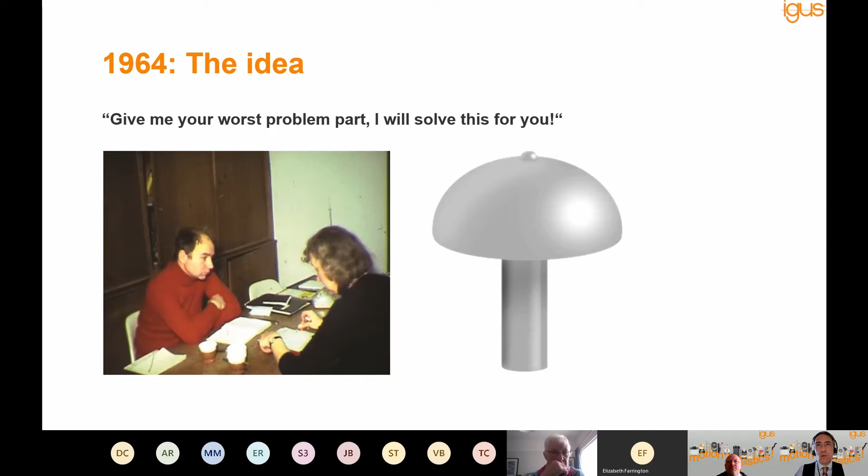There was a second company around the same time involved in manufacturing textiles. Again, the problems they were having was because of greased parts. The textile fibers were getting into the parts and causing very large amounts of wear. We solved that problem with plastics. And that's how the company started.

Fast forward now, we are a business with 3,500 employees, in 37 countries around the world, with subsidiaries such as the UK, still family owned. Gunter's son is now the CEO of the company. We're still on this mission, but we've expanded it out into very different, much broader areas of business. So now we've gone from these two little plastic parts to a full range, a full catalogue of parts.

We broadly describe these into two divisions of the business. One is what we call the chain, based around plastic energy chains. An energy chain is a device for carrying moving cables and hoses. So where you have anything from cranes to accessibility lifts, vehicles, anything that moves on machinery, from the large to the very, very small, we will safely carry the cables and hoses and keep them protected and guided.

In addition, in the 1980s, we developed a range of cables because we discovered that standard cables don't like being constantly flexed and moved. It's a very niche area because most cables, such as the ones you'll have domestically, are used for very light flexing or static use. We discovered they really weren't suitable for millions of movements as you get in a lot of machinery. So we developed a range of what we call chainflex cable.

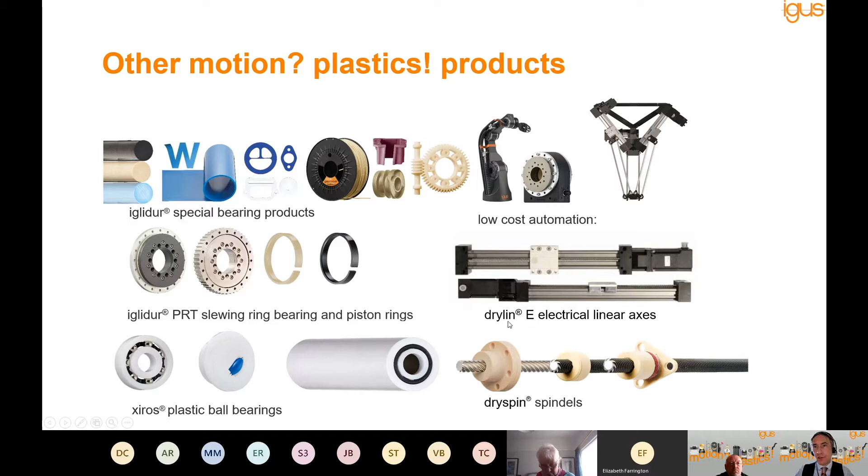More recently, we've developed a lot of different kind of linear systems for spindles, for motion again that we can drive, so we can have either belt driven or indeed lead screw driven systems as well. Again, the same principle where you see these yellowy kind of plastics - that's our self-lubricating plastic, so light, corrosion free, but above all needing no lubrication.

We also work, as well as on OEM applications for repeat business, in the project sphere, where we develop one-off project solutions for customers.

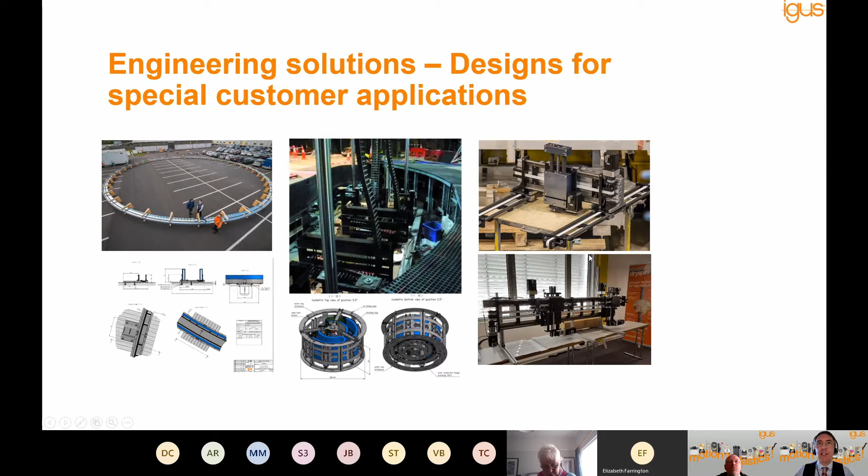And then I mentioned with the gantries that we can offer 1, 2, 3 plus axis gantry systems using our self-lubricating systems. These are a couple of examples of systems that we've developed for customers ready to drop in and drive all of the moving componentry on their machines. So as well as individual components, we go right up to this systems approach.

In 2016, we started to move into another area, which was looking at what we could do with our plastic parts and systems to help with the move to Industry 4.0. In other words, the connected factory, or the Internet of Things, the industrial Internet of Things, depending on your terminology. And for us, this is actually a very logical next step for us.

So as well as offering warranties with our parts, because we test them to destruction, we know how many million cycles they'll take, and we can guarantee that. But actually, the next step is to put sensors into the plastics, embedding sensors in, so that customers have a very clear indication of when the part is a certain way through its life, or indeed if it's in an exposed environment where it could get damaged by the industrial application, where it can stop the machine instantly before something gets really damaged.

So we have all sorts of different sensor systems that look for whether things like the energy chains are broken or the cables are failing because maybe a product has fallen into the application and damaged them. And it can stop the machine instantly to prevent further damage, and can alert engineers via SMS or email or anything you want. Or it can also be embedded into a cloud-based system where you can constantly monitor these components within your factory and see maybe where they are in their lifetime.

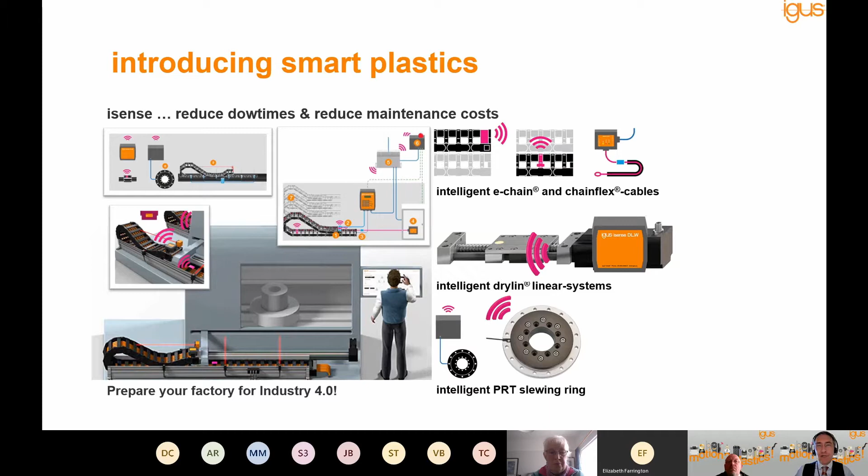And that's a really interesting next step that very high value manufacturing, so for example automotive industry, is really taking up this area, because of course downtime is very critical and very expensive. But more importantly, it's a very good thing for sustainability, because traditionally, factories would maybe replace these parts after a certain time in their life, but now you don't need to do that until they really are truly at the end of their life, which means you get more life out of them, and that's a more sustainable approach.

So that was just an overview on in terms of igus, how we started, where we came from, and our current product stream, and where we are. So I'm now going to hand over to Chris, who'll pick up, and we will then explore more about what this means for sustainable plastics.

Good morning, everyone. My name's Chris Foot. I've been with igus, this is my 20th year now. And I'm really just going to run through the basics of why use plastics in industry.

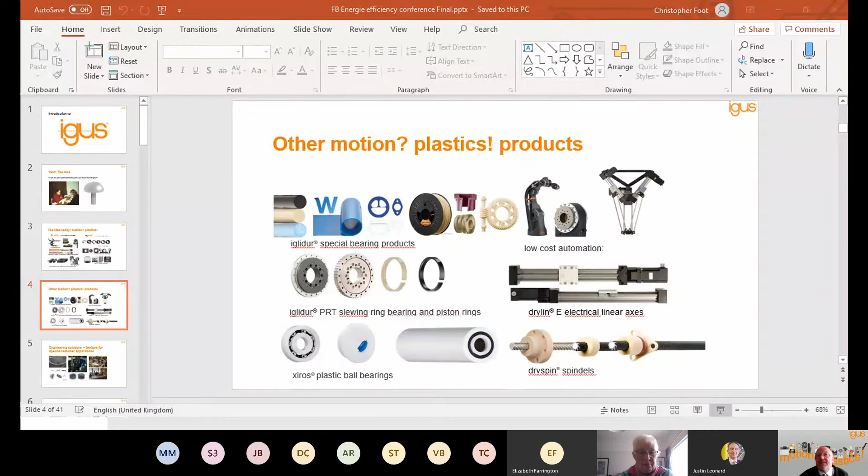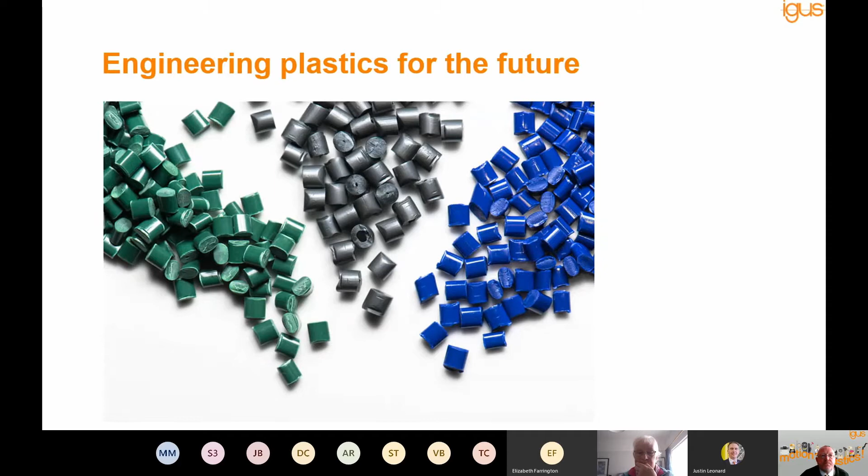So engineering plastics for the future. Yes, we know there's a lot of bad press about plastics, but we're going to run through all the good points and what we feel we are doing to help going forward. Efficiency gains relating to energy can be achieved in many ways. Obviously, there's some big pluses for plastics. They're lightweight, they're easy to machine. But how can we go forward? How can we move forward with plastics in industry?

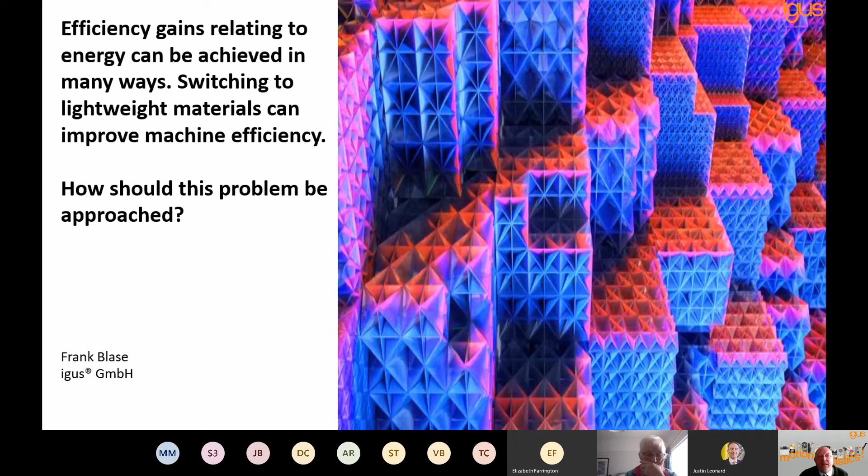Something we come across a lot of the time is, and this is a true statement for a lot of people, certainly from the older generation, those who know plastics use metal. There's still a lot of the older generation that won't look at plastics because metal is the way to go. It's been used historically. People won't change.

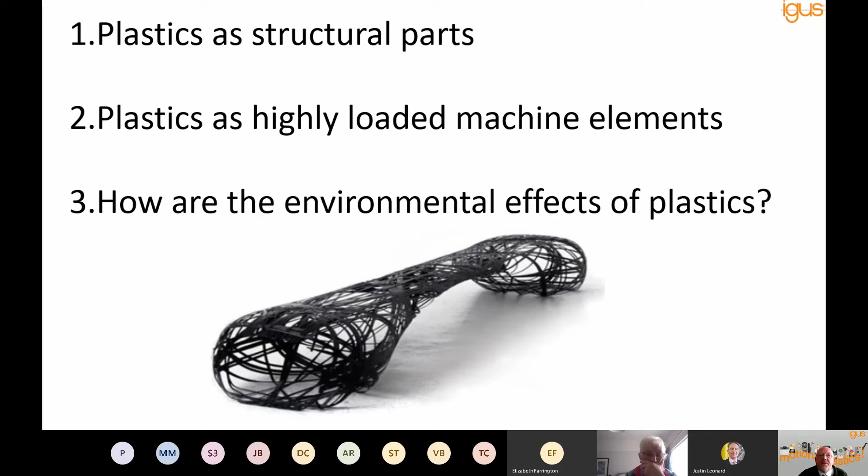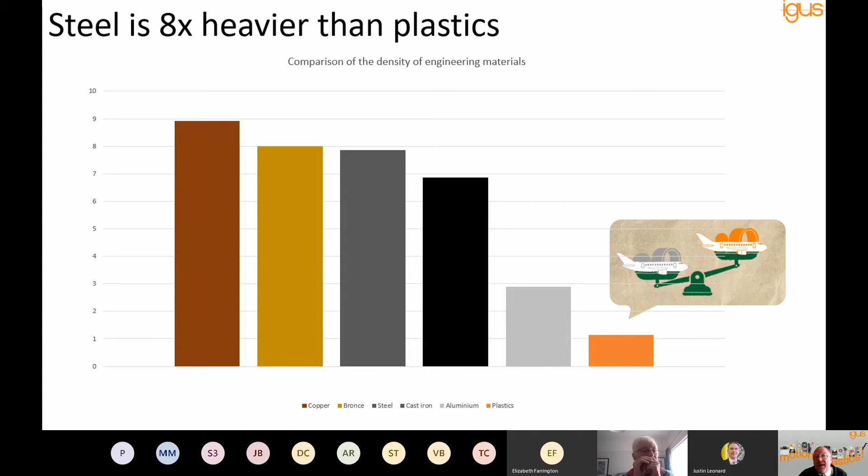So plastics as a structural part we'll cover, plastics as a highly loaded machine element, and how are the environmental effects of plastics. Firstly, something very simple but very true: steel is 8 times heavier than plastic. Definitely true. And as we go along, that will become apparent as to why we've put that in there. Obviously, copper, bronze, steel, cast iron, even aluminium, way more than plastic.

Oh, sorry about that, bear with me.

Automotive, definitely a big industry for igus. Obviously one of the first parts, or the first part we ever produced, was for automotive. And again, a 25% weight saving. Sorry that the right hand side's in German. This will make everything more efficient. The whole unit is lighter. That means the car is lighter. That means there will be less power needed to move that car.

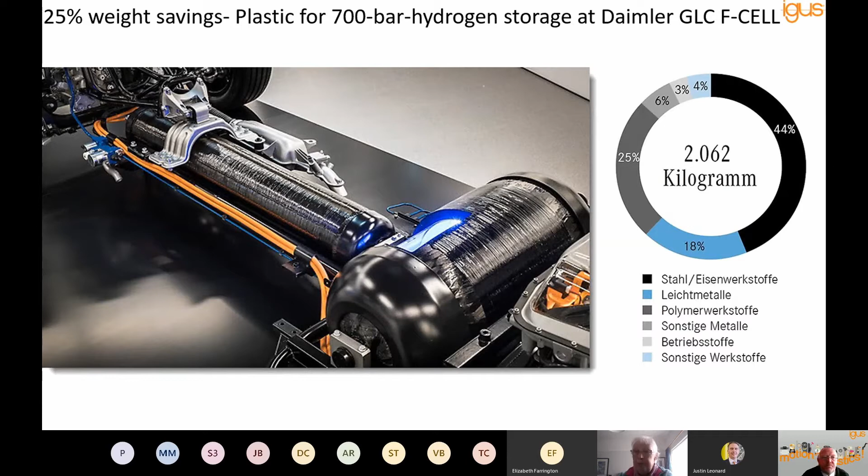A strange one, but true. Football shoes made of plastic. 70% plastic and weigh only a third of shoes from 10 years ago. There is an argument that they don't protect the player as much, but they are lighter, giving freer movement.

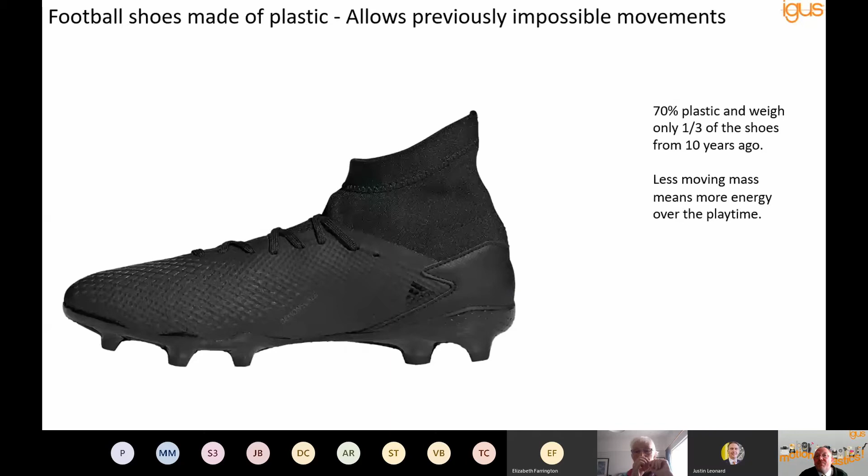But that's fine. But what about moving parts, high load parts? Can plastics, polymers cope with this type of thing?

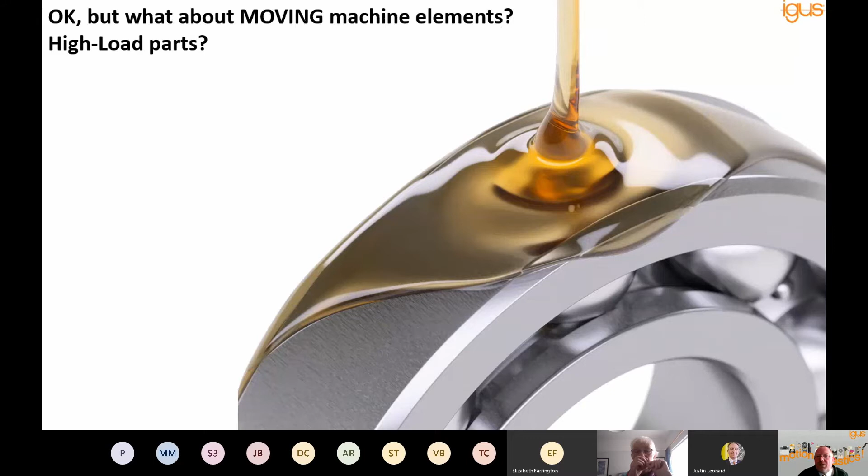Well, there's some true facts. igus are very big in the automotive industry, but also very big on the internal side of planes. We do a lot with seating, the cabin equipment, that type of thing. But going through those facts, I'm not going to read them out to you, you can see them. But obviously the bottom one, 7.5 tons less of CO2 a year by switching to plastic bearings within the seating elements. So you've gone away from your typical DU bush, your metal backed PTFE bush, or your brass or Oilite type bush, and switch to plastic. That is the saving on one plane flying a year. Now that adds up.

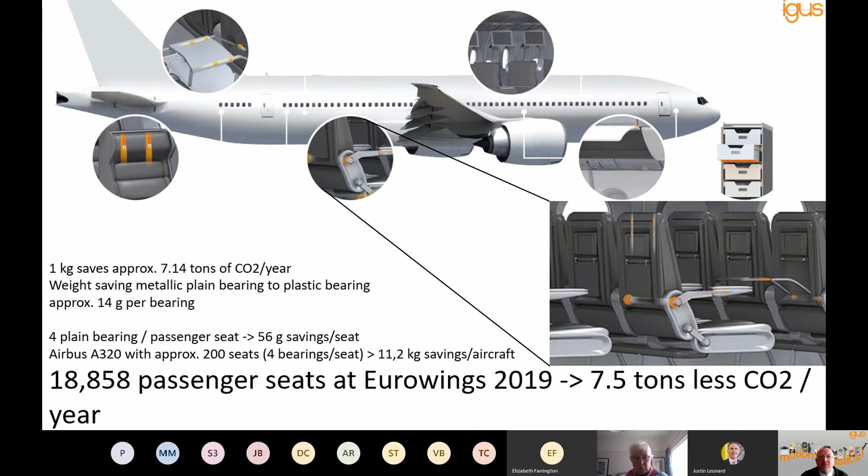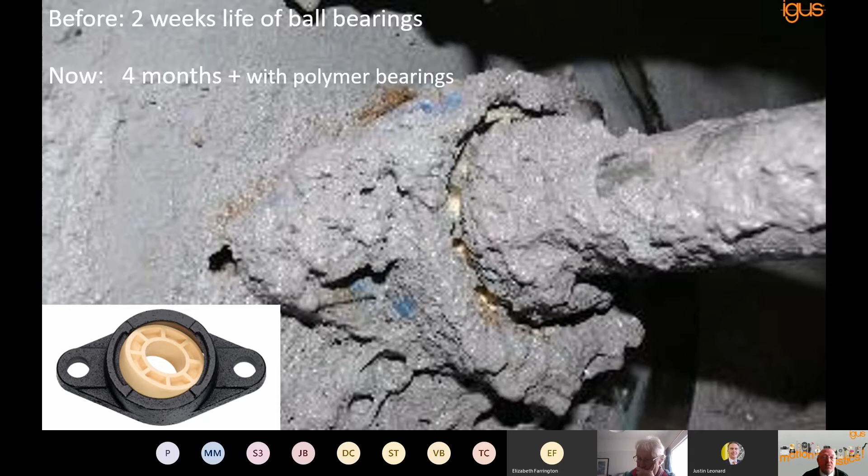Excavation equipment. Nobody in their right mind would put a plastic bearing in the pivot, but they would, because they work, and they work very, very well, and they work a lot longer, going back to that previous slide, because of the dust and dirt, depending on what material you use. Now let me specify something here. We have a range of 64 different materials. We have to get the right material, but I'll come to that in a bit later. But plastic bearings do work very well in very, very high loads. We've got bearings that can go up to 150 which is a very, very high load. And also shock loads. We can take shock loads. Metal bearings can't cope with shock loads. Something has to give, either the bearing or it digs into the shaft. So again, there's a saving there. If we can make these pieces of equipment last longer, there's less metalwork shafts needed to be produced, be replaced.

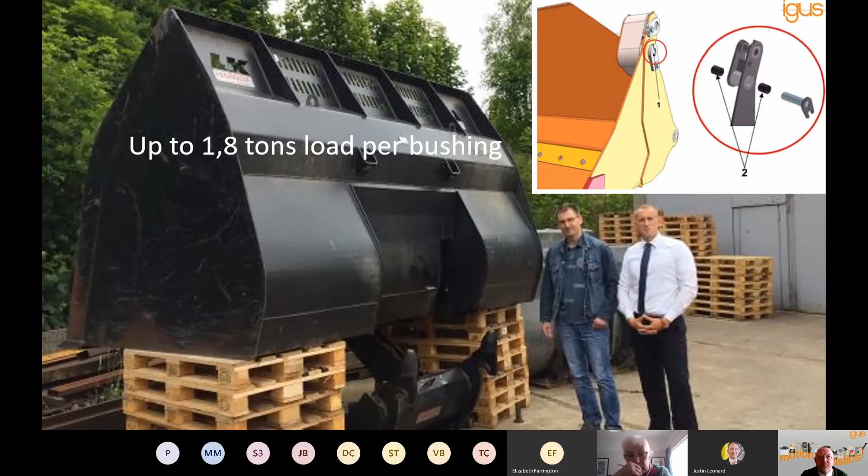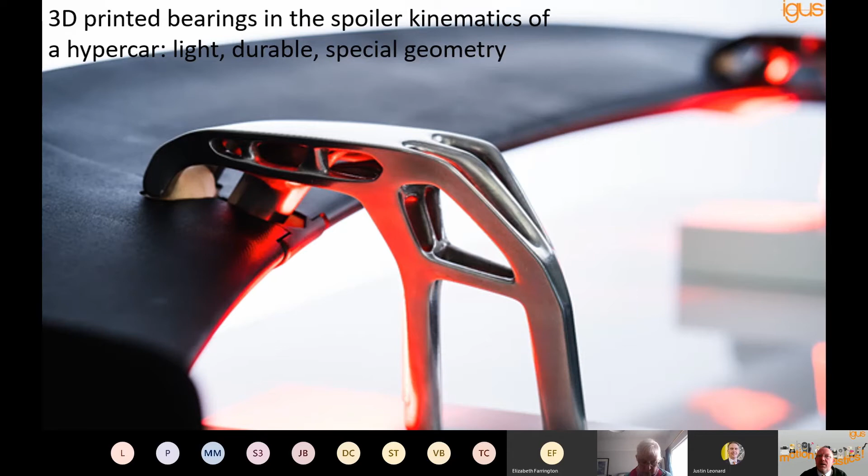Then we come to something that Justin touched on, 3D printing. It's a relatively new thing for us. I would say about 3-4 years. We've got a range of filaments and also SLS. Now, again, there's a big saving in doing this because you've not got any waste. You use the material you've got. And with the SLS, if it's not used once, it goes back in, used again. But obviously, we can now do very, very specialized, tricky parts. All we need is a step file and away we go. So certainly the future, maybe not totally outdoing molded parts, but we're certainly going to move forward in a big way in this field. And it's certainly something industry wants us to do.

Going back to what I was just saying about choosing the right material, you can see a range of materials on here. We've got 64. There's only a small range here. You can see some wear from shafts of other bearings, shall we say.

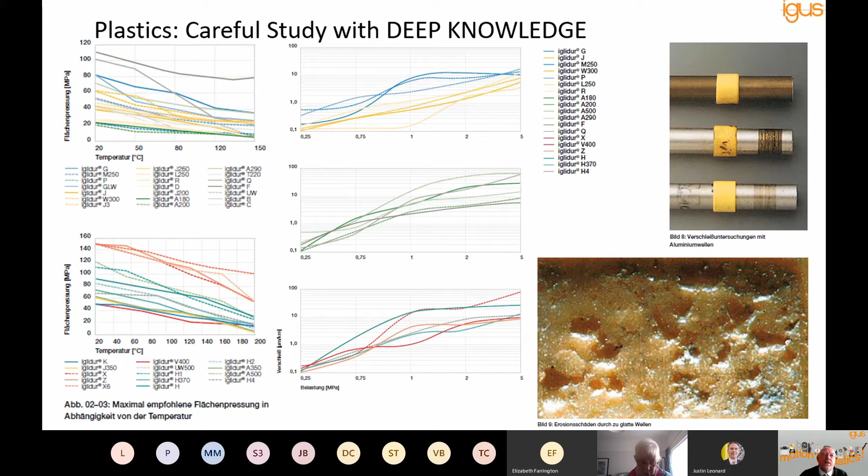We do a lot of testing, and to do that testing we need a laboratory. This is how many tests we do a year on average, 135 billion test movements. This means we can predict the life of our bearings, which is a big cost saving for the industry, because we can give the right bearing that will last the longest at the most cost effective price. What we don't want to do is give somebody a bearing that's amazing but doesn't last long. That's no good for anybody, and it certainly doesn't help with wear, which we want to keep to a minimum, which helps the environment.

300 tests permanently running in parallel. A lot of these are on the energy chain, which Justin spoke about. These will go backwards and forwards. In fact, we've got one energy chain that's been running over 35 years, just going backwards and forwards. And almost 11,300 tribological tests.

That is where we are developing new materials all the time. I think this year we brought out 3 new materials. One's UV resistant, so for the solar industry that's going to be great, because it will sit in a field for many more years than some of our standard bearings, which can be affected by UV rays. The longer these bearings last, the better it is for the environment.

As you can see, results go directly online for our experts. If anybody wants any help with these at any time, please contact us or go through Elizabeth. We can help people choose the right bearing for the right application, and the chain and the cables.

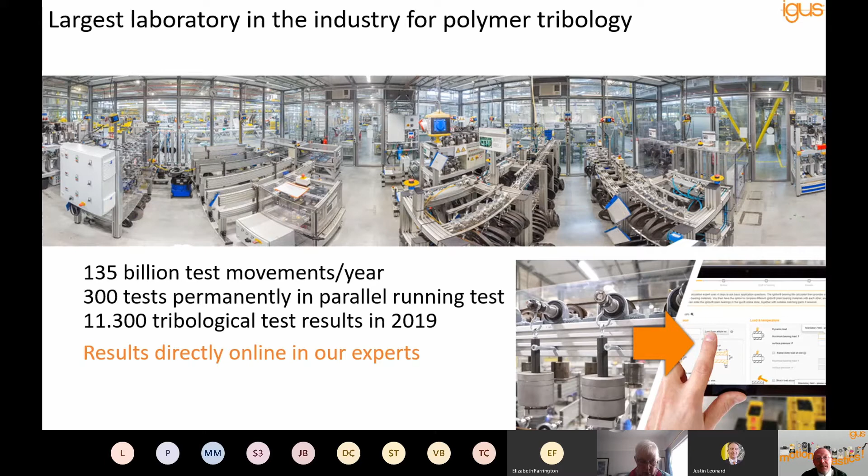These are the tools, very easy to use, all online. You don't have to log in and register. You can go online and use these tools for free, or you can give one of us a ring and we'll go through it with you. Very easy to use, but it gives you a very good indication of what bearing, chain, or lead screw system you should use for your application.

Motion plastics. How are the environmental effects of plastics? Well, this is a big topic. It's something that we as a company have moved forward with very quickly over the last 5-6 years. We've seen that we needed to change the way we did things, and we reacted very quickly. And it wasn't due to pressure from outside. It was something we wanted to do anyway.

Before making the materials, obviously it comes from a base. Plastics are oil based. We have to make sure we get the most out of these plastics. We have to make sure that we recycle what we don't use. So if you've got an 8-cavity tool, we have to recycle the sprues. If you've got machine parts, we have to make sure that these parts can be recycled.

Energy balance of different materials. You can see how much it costs in energy to produce steel and aluminium, roughly the same. Plastic, it's a lot less. A lot less.

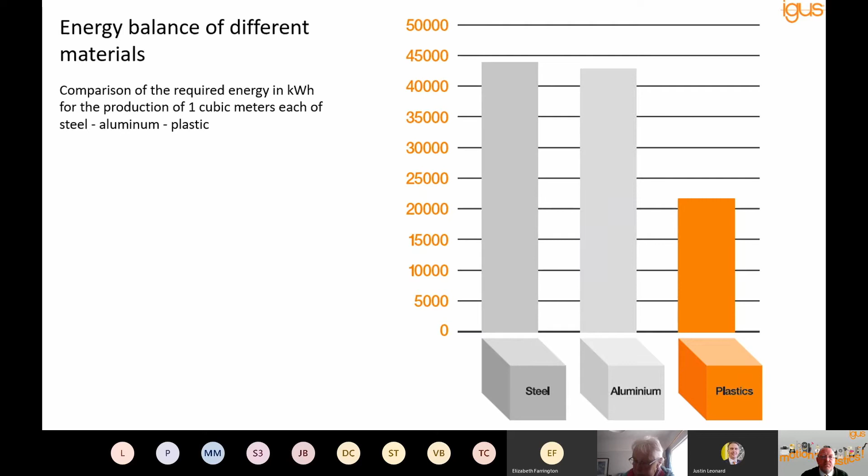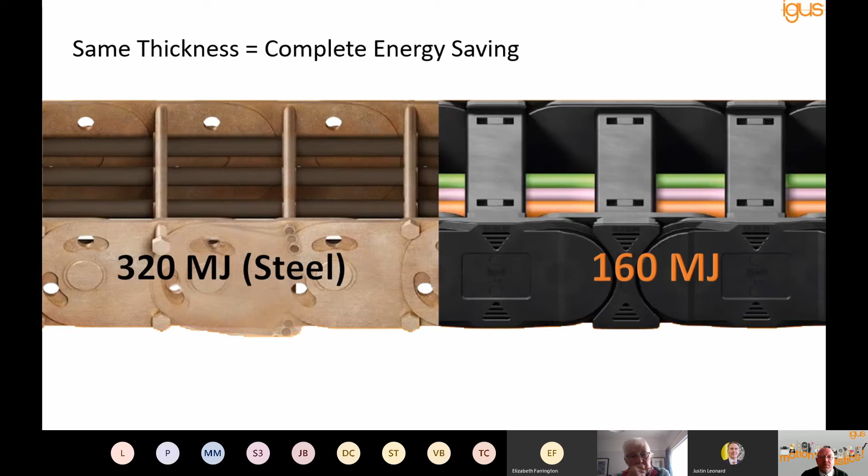Automotive use and lifetime. Now, everyone knows that you have to recycle a certain amount of plastics that come out of a car. Most of our parts don't fall into that category, but we put them into that category anyway. We can recycle all our plastics. All our plastics are recyclable. Yes, you might have to group them together, because depending on what goes into it, the fiber, the reinforcement, that type of thing. But yes, we can recycle them.

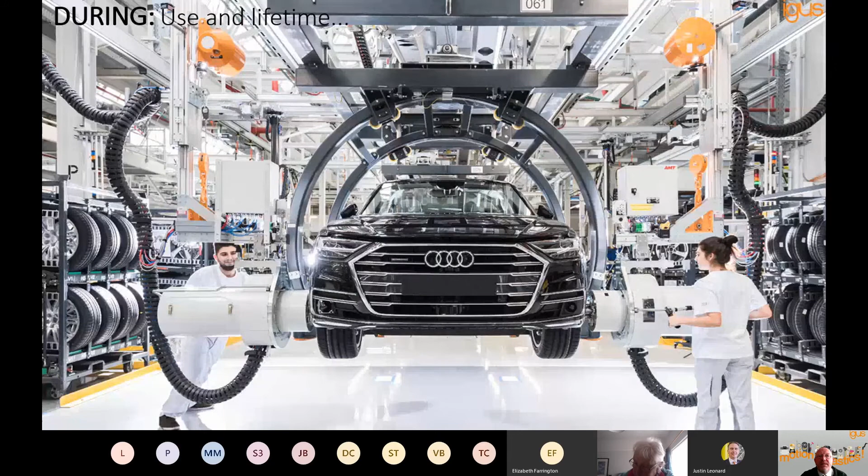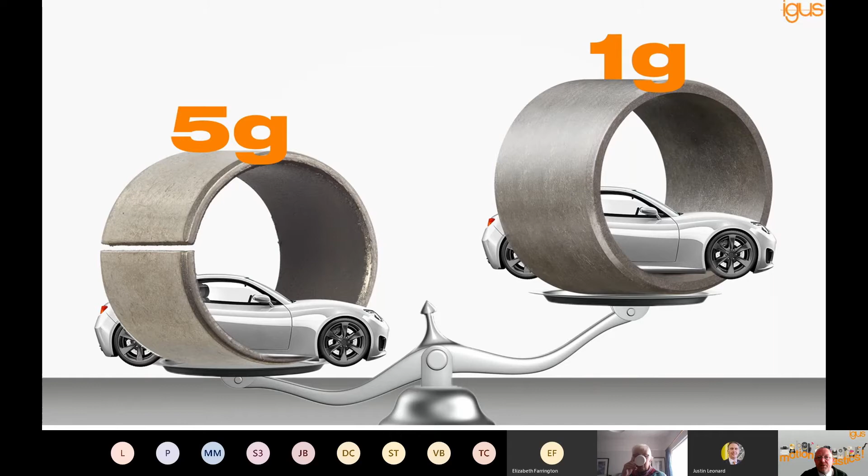Going back to the weight that we discussed with the airplane: 1 gram for plastic bearing compared to 5 grams for metal bearing within the automotive industry. Now, we're not talking sports cars here, we're talking general, normal cars where you can have a bearing in the foot pedal, something in the steering column, maybe the boot hinge. We can take weight out and make these cars more efficient.

With a polymer bearing and a solid lubricant, that doesn't happen. If you choose the right bearing, it will wear 1 micron in the first week, maybe, 1 micron in the second week, 1 micron in the third week, but the percentage of lubricant is always the same. You don't need to grease it. In fact, we don't want people to grease it because it can affect the bearing, and also all you do is attract dirt, which again is a bad thing for a bearing.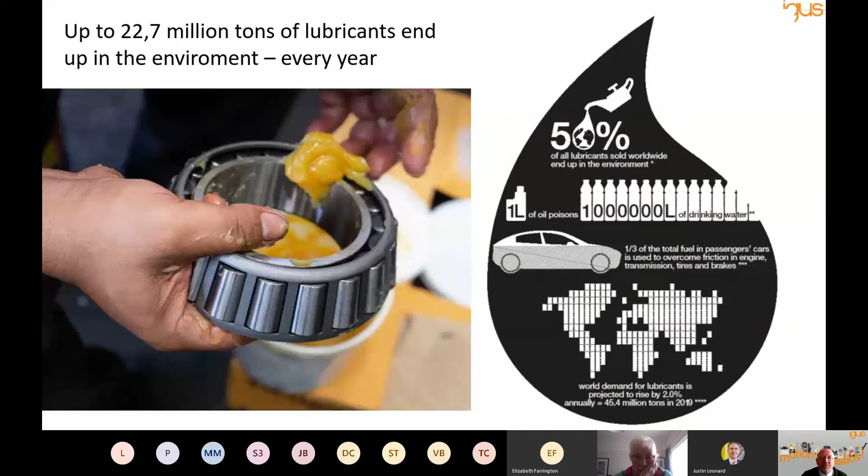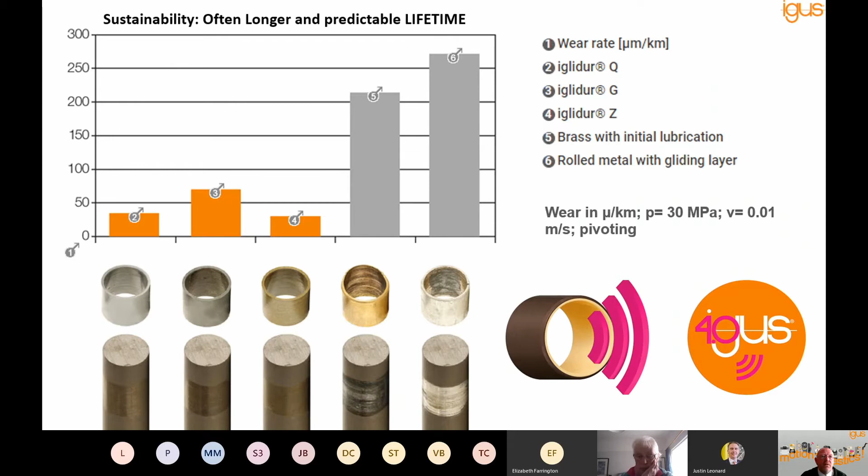So you take the rolled metal, i.e. the DU type bush, compared to Iglidur Q, we're looking at maybe 6-7 times longer that it's going to last. That's a big saving for the environment. Going back to what we said about how much energy it takes to make a metal bearing, there's a big saving there.

But as you can see, plastics, and this is where it's got a bad press, there's a lot of waste plastic. A lot of waste plastic, and we create this as humans.

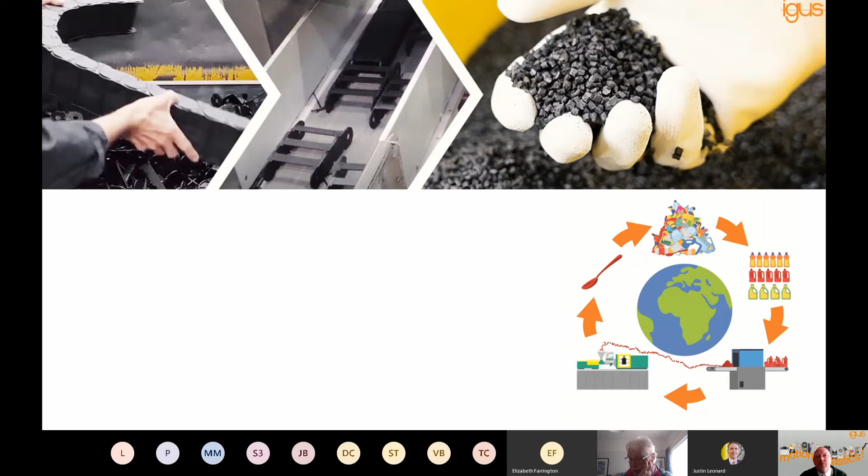What can we do as a company? We can recycle. So igus, approximately 2 years ago, set up a scheme where we will take back anybody else's energy chain or anybody else's plastic material, as long as we know what it's made from, and get it recycled. Now, most of this will get recycled into playground equipment, surfaces, roads, that type of thing. But it's getting recycled, and we're doing that off our own back with other companies, which I'll come to in a minute.

Plastic to oil. We can take the oil out of the plastic, very clever way of doing it, way beyond my intelligence, but it can be done. And we can get a certain percentage of oil out of that plastic. What's left will go back in and be made into other things.

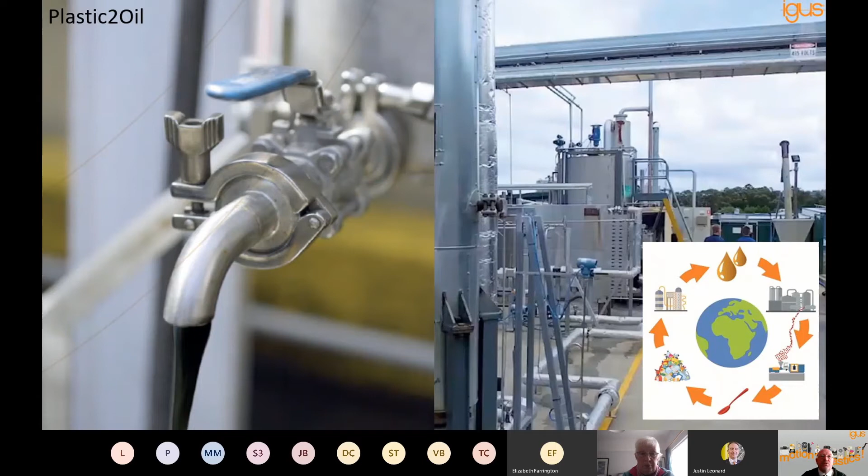igus this year has had 4 million investment with Mura Technology. Now, these are the guys that are basically recycling plastic, not necessarily ours, but any plastics. And we will get more and more involved in that over the years because we have to. We can't afford to let the world think that plastics are bad, that you can't do anything with them, that once they're done, they just get thrown on landfill. No, we have to recycle things, and going forward, that's exactly what we're doing.

The right mix. So, as long as we get the right polymer into the right application, this can be the bearings or the chains, we can make them last longer, run more efficiently. That is the right mix.

What we don't want is for people to go in and pick a plastic bearing, choose the wrong one, it lasts 5 seconds, it takes the shaft out, bad for everyone. So that's why we keep investing in more and more different materials, more and more different chains, more cables, and always moving forward. So the 3D printing, that will be very big for us, although it already is, but it will get bigger and bigger.

Going back to testing, the more testing we do on our materials, the better the world can understand them. We'll understand them, you can understand them, and we get the right material in the right application.

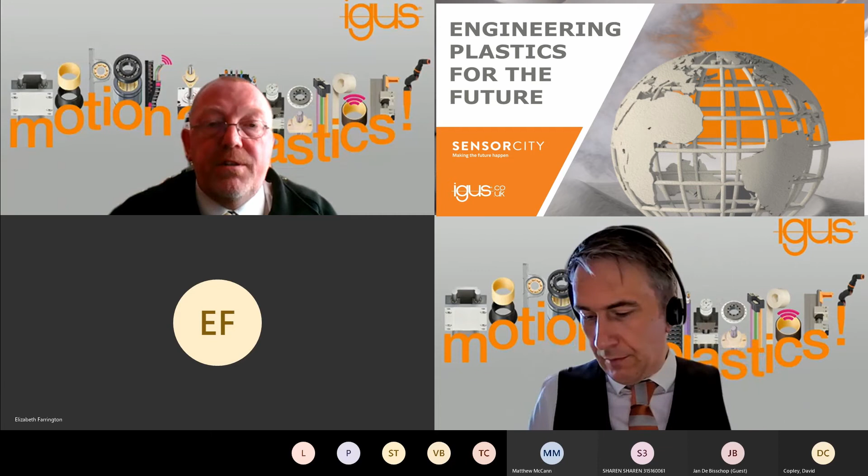That will save a lot of energy in producing grease. It'll also last a lot longer than a metal bearing, which sometimes can't always be used in the food industry. That's an innovative part that igus have developed.

We'll keep developing new products. Obviously, we do it with customers. Most of our products are developed with customers, and then we put them into the field. I hope that's given you a very simple feeling of what igus are doing and how we're progressing as a company and trying to be as forward thinking as we possibly can, but still using polymers.

Now, if anybody has any questions, or Justin, if you want to come back in. Yeah, so I'll step back in. So what I'd like to do is share my screen, and then I'll answer. There's a couple of questions come in, so thank you to Phil and Matthew for your questions, and I will answer those in a second.

I just wanted to share my screen again to show something in terms of our website, so we can see this here. So a couple of things that I wanted to talk about. First of all, sustainability - this is directly from our website. You can find this at igus.co.uk/info/sustainability, one of our key topics.

This talks about a couple of areas which I think are useful extensions of what we've been discussing. First of all, to highlight that both in Germany and also in the UK, in our own right, we have ISO 14001:2015 environmental management standard. Most people know ISO 9001 for quality, 14001 is the environmental standard in the same way. The thing about these standards is they force you to be progressive - you can't stand still, you always have to be getting better and better.

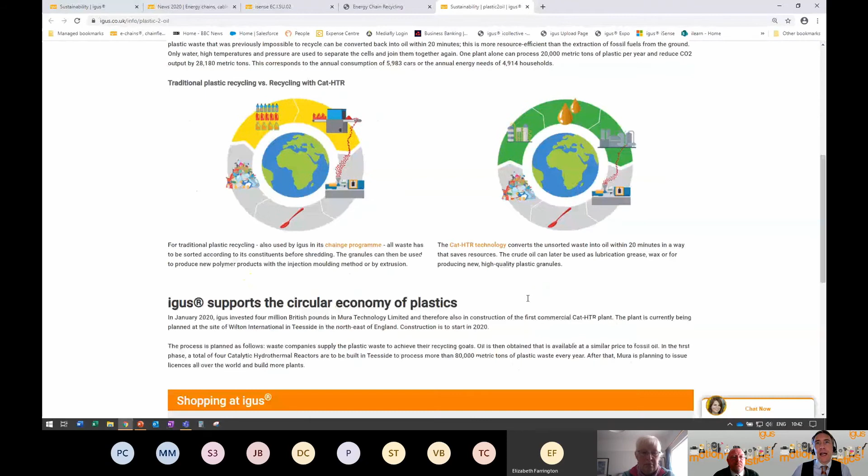And finally, this will hopefully answer one of the questions we had here, from Matthew: what are the objectives of the investment that we make with Mura? Well, there's a page on igus.co.uk, info plastic to oil. This page describes what we're doing, and the point about the Mura technology is that there is a catalytic process which can basically turn plastic back into oil, which is a really big game changer. Up to now, that's been a very energy intensive process, but there's some really clever work going on now to make it a very sustainable process. Rather than going through that in detail, I think that's a really good page, so I'll paste it into the chat, Matthew, and hopefully that answers.

But ultimately, what we're trying to get to is a circular process with plastics, because the key thing about plastics ending up in the environment - and one of the things we should note - is that plastics getting into the environment is predominantly consumer plastics. That's where most of what we see is, it's consumer parts, and that of course has to be addressed. But even for industrial parts it's important. If you can have a cycle that runs completely, back into oil and then back into plastics again, yes, of course there's an energy element, but we've just explained that it's a lot lower than for the equivalent metal parts. If you do that, you take them out of circulation into the wider environment, and that's really ultimately what the goal is about. So again, Matthew, I'll paste that in to answer that question for you.

There's another question we had, which is a really good one, from Phil: what are the safety benefits of using plastics compared to other materials? So I'm just going to put the screen back up to one of the slides here to give you an example of that.

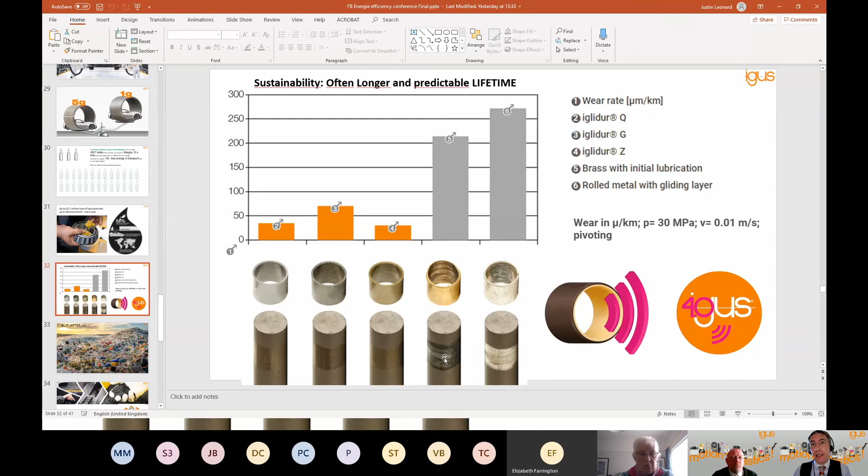Let's take a very simple example of a plain bearing. When a plain bearing runs on a shaft, if the plain bearing deforms - because it comes under an edge load, or because of vibration or fatigue - it will actually damage the shaft. Crucially, if it dries out, if there's not enough lubrication, or it damages the shaft like that, the whole system can actually stop working completely, it can just seize up. So you're absolutely right, there is a safety element depending on what the machine is doing. The same thing with ball bearings, or any kind of spherical or roller bearings that are greased up. Again, if the grease attracts dirt and the dirt seizes the bearing, it just stops dead. And whatever that machining operation is, it could be in a medical unit in a hospital, on an X-ray machine or a scanner, it could be on something within a car. It can just seize, and there is a safety element within that as well.

Now typically plastic plain bearings will not seize up, because there's no moving parts to seize up, there's no ball bearings to seize up. So what happens is the bearing will gradually wear over time, and will gradually break down over a very long period of time, but it doesn't have the catastrophic failure that you get often with metal alternatives.

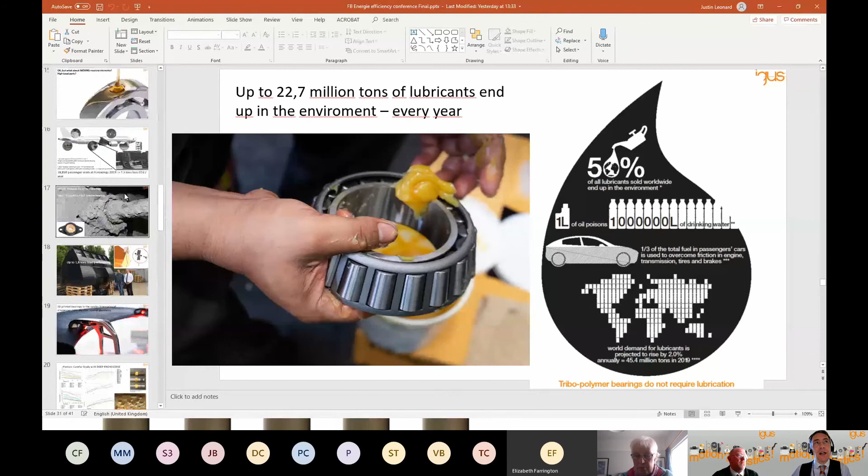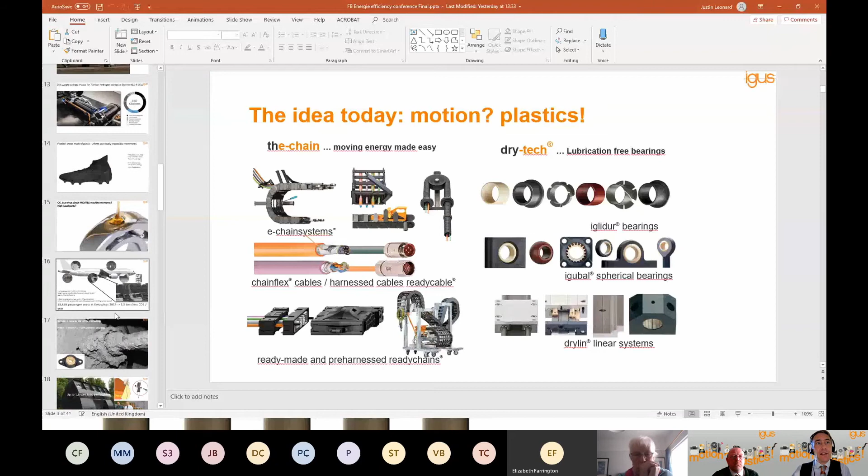Going back to the same thing with the cable chains, if I can find another slide to show what I mean by that. Looking at the cable carriers, again, if these are made from metal, if something takes a side load, an edge load, a bending load on it - take one of these here, for example, in steel - that will deform and stay deformed.

I've seen this happen with cases where metal chains have been used, where the system has bent and then tried to move, and as it moves, it catastrophically fails. All of the nuts and bolts that hold it together, because it's made up of several parts per link, become like shrapnel. They can move very fast, and we can get seizing of the machine, but worse still, parts flying off.

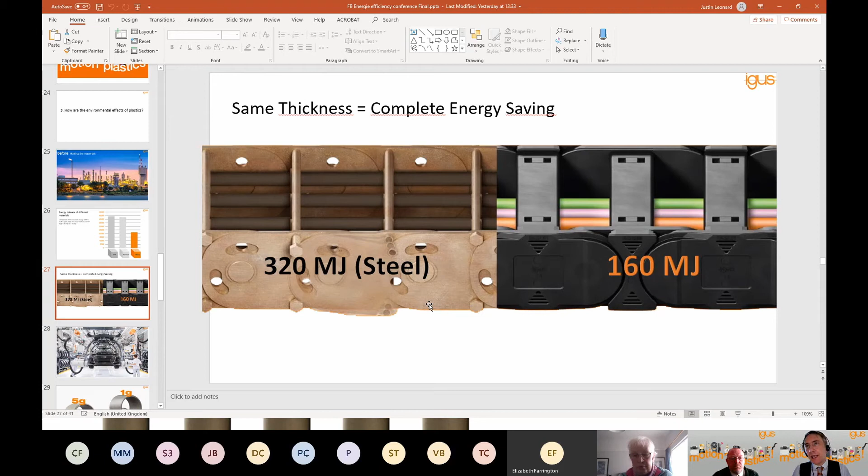With plastic, the beauty is that it has an intrinsic flexibility. It has some spring in it, some give, which means if it comes under loads you don't expect, it won't shatter or bend and stay deformed. It will deform and move back again because of an intrinsic elasticity, which means it's far less likely to fail catastrophically. Hopefully that answers the question, Phil, about the safety benefits, because of the intrinsic flexibility and so on.

Wendy, thank you for your question. How much abrasion of parts do you get on these moving parts? Does the plastic get more rigid with age? Okay, so two different questions there.

In terms of the abrasion of parts, yes, absolutely, that is how the system works. You do get abrasion of parts. Basically, plastics wear in a very linear way. There's an initial wear, which is where the plastic coats the surface of the shaft or running surface at a very microscopic level. So you kind of have almost plastic running on plastic, so there's an initial abrasion.

But after that, plastic wears in an incredibly linear way, which is why we can offer warranties with our parts and guarantees over how long they last, because it's incredibly simple to work out. As long as you've got lots of test data, which we do have, under certain loads, temperatures, conditions, you can see how it will wear and how long it will last. The lifetimes we're talking are very large, usually for the life of the machine. We do offer line replaceable parts, but usually things will last over the lifetime of the machine.

Does the plastic get more rigid with age? So you're talking about things like UV effects. Well, no, if it's specified correctly for the right application, it doesn't change property over the life of it. This is one of the beauties of, for example, a plastic bearing over a metal alternative, it's not a coating, it's homogeneous. You have the same plastic all the way through, so as it wears, the properties stay precisely the same over the life.

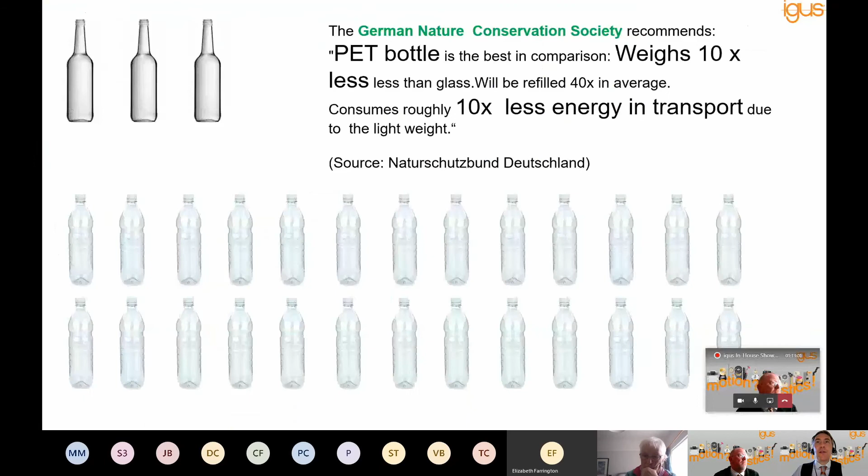For cable management systems, this can be everything from patient beds, the motorized beds that lift and lower, which have small cable management systems to carry the power sources, to scanners, so everything from scanning systems to treatment systems that usually have rotating scanners in them will carry plastic parts.

A good example we've done in some hospitals around the UK is where you have an X-ray system, which you would traditionally have one X-ray system per room in an emergency A&E area. But actually, they've now got multiple booths, and the whole system is moved around from the ceiling, so you can use the same bit of kit to work with different patients very quickly between the rooms. That's a system where we often supply power and data using our cable management systems into those environments.

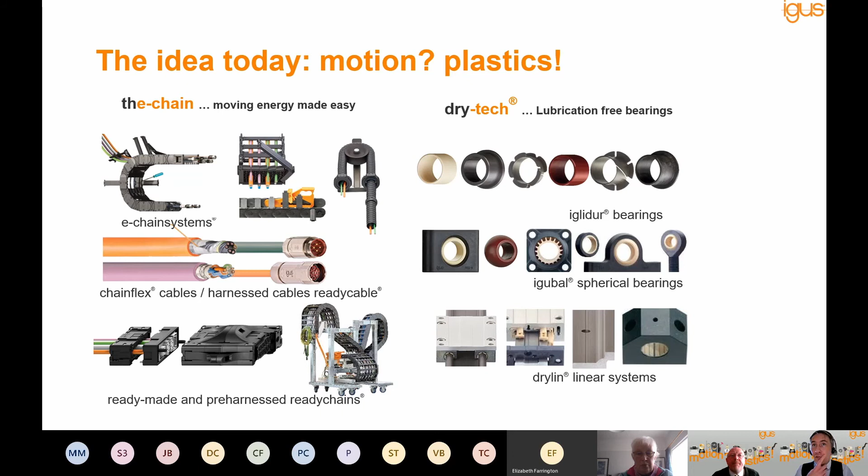On the bearings, again, a myriad of uses - anywhere where there's a pivot point, everything from screens to beds to scanning and treatment systems, and in fact right down to prosthetics. We have some bearings that go into prosthetic limb joints, and the saving there is obvious because you don't need to grease the part, which is the last thing you want to be doing on a part like that. But also it's very light, and if you're trying to have a prosthetic part, you want that to be as light as possible, otherwise it's a real burden for the person using it. So every gram you can save by using something like a plastic bearing for the life of the product becomes very important and very valuable.